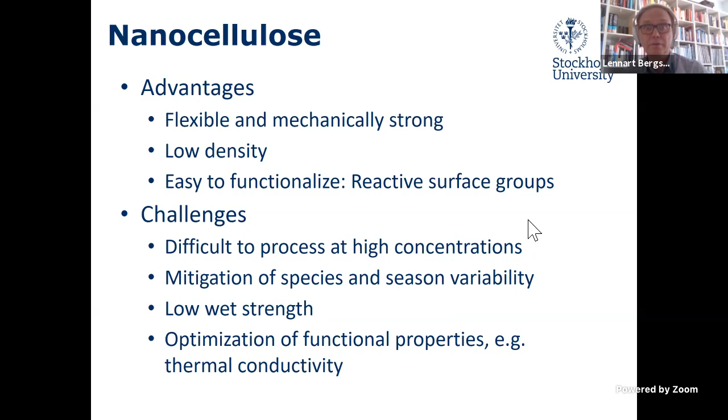So the content of the talk will be, I will present our recent work on the leather-inspired engineering of multifunctional biohybrids with high wet strength, then go over to a patterning. I will present that relatively briefly.

A Bogolan-inspired patterning in nanocellulose films, and then focus on the heat transfer of nanocellulose-based materials, going through the fundamentals, talk about films, and then isotropic foams and aerogels, and then on anisotropic foams, giving examples and trying to relate this to the fundamental modes of heat transport.

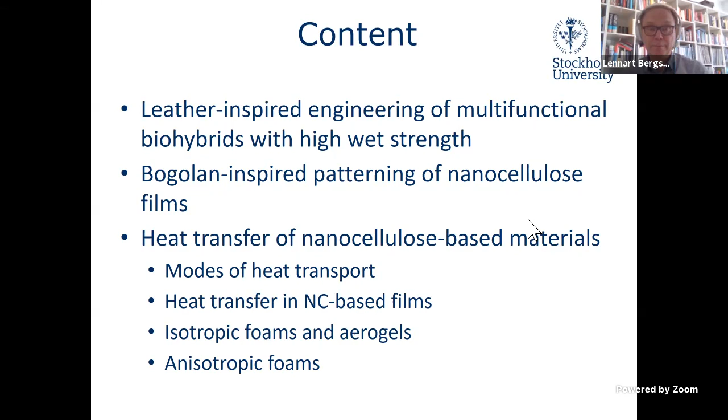Starting then with the improvement of the wet strength by a leather-inspired approach. This is work done by my PhD student, Konstantin Kriechbaum. It was recently published in Biomacromolecules. And the idea here is relatively simple. We have been inspired by how leather is being made.

And the basic process in leather making is a precipitation of the proteins by tannins. Today, there are other types of compounds being used, but the traditional way of leather making was to use tannins. So it's a precipitation of proteins.

And these precipitates then have a very low water solubility. They are quite robust and also flexible, which is why leather has quite nice properties. And our idea was simply, can we also instill these kinds of properties into a nanocellulose-based composite?

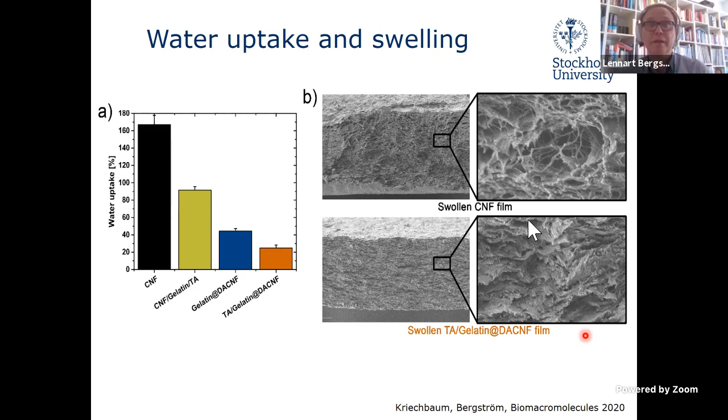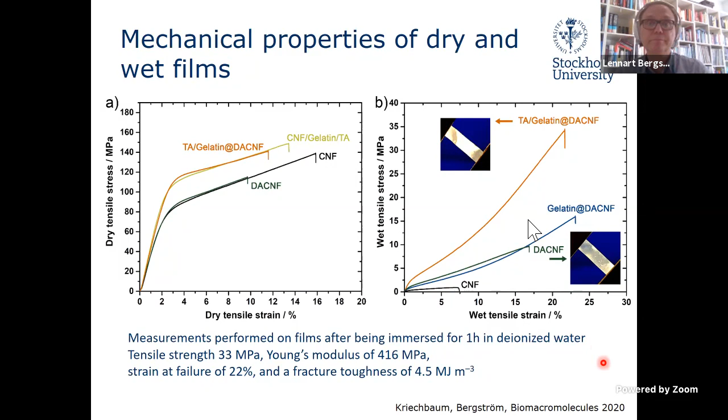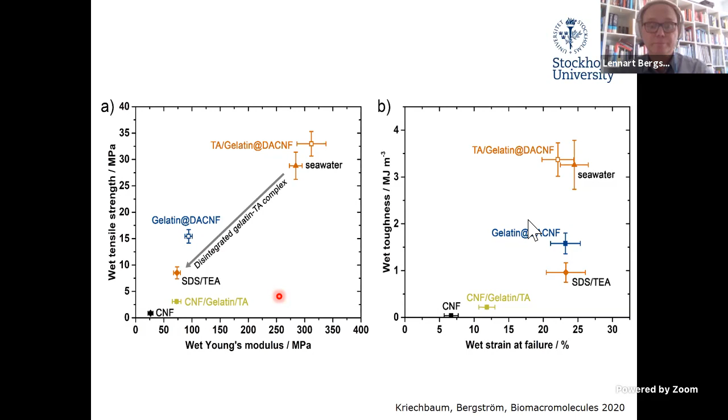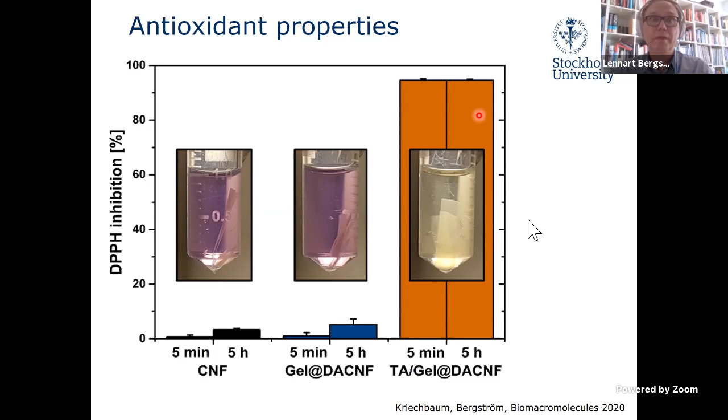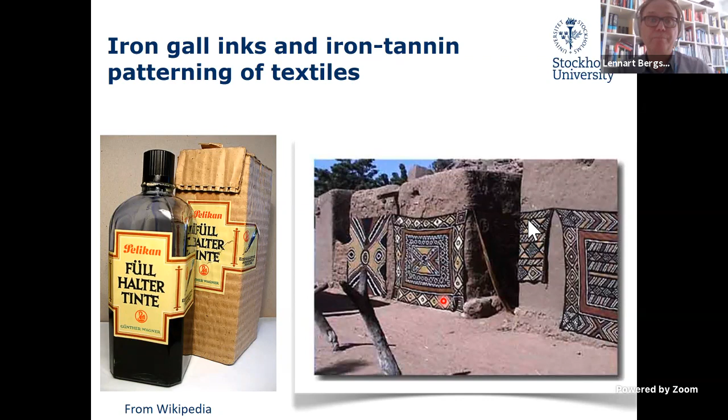But it's also important for a lot of dyeing of textiles, in particular cotton-based textiles. And this is an example from the so-called Bogolan type of dyeing, which is very important in the country of Mali. We took inspiration from this and tried to devise a patterning method based on iron and tannins. And this is an example of when we are mixing the tannins, like gallic acid, ellagic acid, and tannic acid, with an iron source and cellulose nanofibrils.

This was supported by modeling done by Jakob Wohlert within the Wallenberg Wood Science Center, trying to understand how gallic acid and ellagic acid interact with the nanocellulose, and how they cluster. And the modeling clearly showed that the interaction is immediate, but the mobility of the gallic acid and ellagic acid on the surface of nanocellulose is quite rapid. And that's why after a short time, they will form these kinds of clusters. And it's these clusters which later react with the iron, forming the coordination complexes.

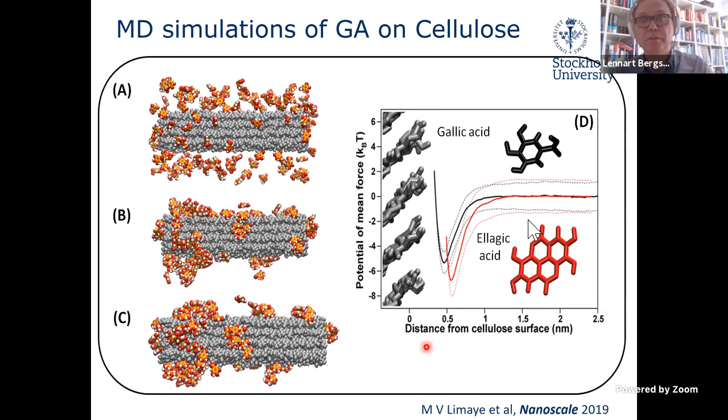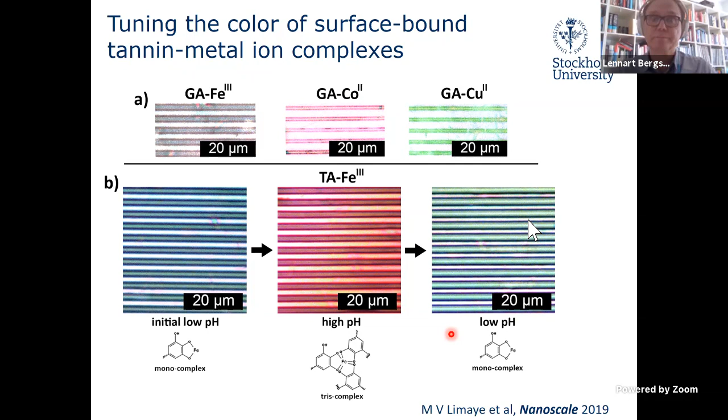At low pH, it's dominated by a monocomplex, and the tris complex is dominating at high pH. And as you can see, these have different colors, suggesting that this kind of simple patterning approach can also be used for sensor applications. Okay, let's move on to the final part, which is going to be on heat transfer.

Typically wood has a factor of 2 or more difference in heat transfer, transversal or axial to the lumen direction. And some people have utilized it to study the effect of alignment in thin films. I'm going to give an example of that, in particular work by Dr. Uetani in Japan, who studied drawing films with various forms of cellulose nanocrystals, and then studied the thermal conductivity as a function of the order parameter in all 3 directions: the draw direction, the transversal direction, and the normal direction.

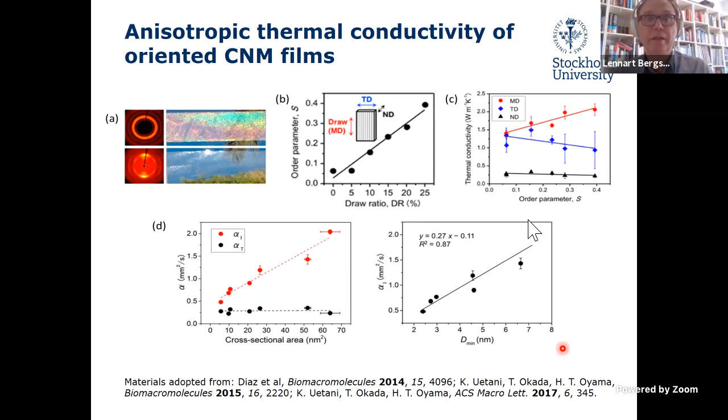Moving over to foams then, where my own research has focused. I think all of you are aware that there is now a lot of interest in making nanocellulose-based foams. They are lightweight, pretty strong. But one of the big challenges is, of course, how to make them. Here, the removal of the solvent, which is normally water, and the engineering of moisture uptake and release are crucial points.

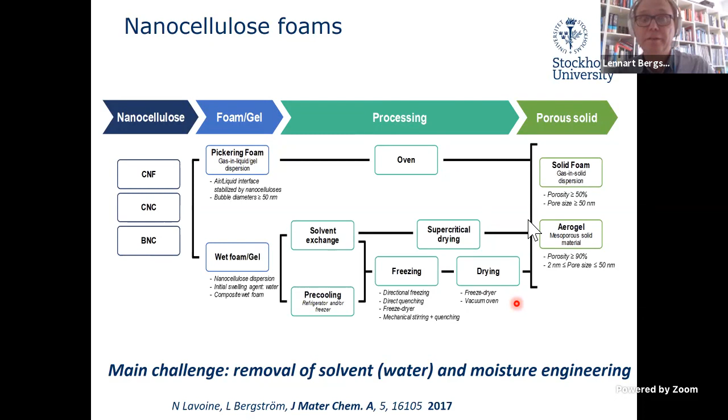Here's an outline of the main techniques to produce them: either supercritical drying, freeze drying, or evaporative drying, in an oven or just at room temperature. Of course, evaporative drying has the advantage of scaling and being pretty cheap, but the problem is that you have capillary forces during drying, which can collapse the structure. That's why quite often supercritical drying and freeze drying are preferred.

Here are a couple of examples of isotropic nanocellulose-based foams produced by evaporative drying. This is early work done together with Lars Wågberg and his group, where a Pickering foam was made using a short chain surfactant, octanol, or octanoic acid, which provides the particles with some hydrophobic character. And this was done in my work, where we also used calcium as a way to precipitate or strengthen the network to resist the stresses during evaporative drying.

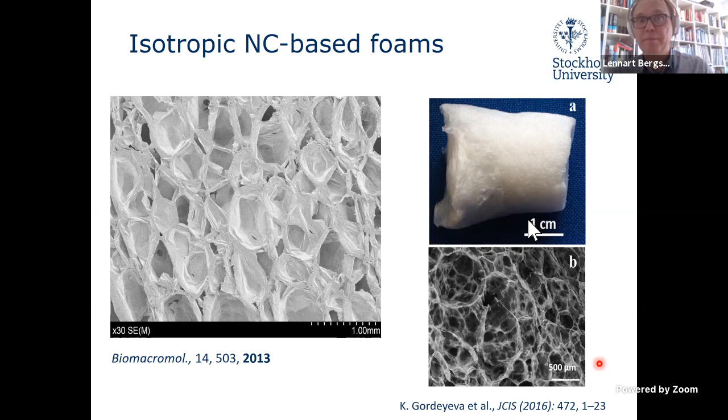But the key point here is that the pore structure is isotropic, and there is no preferred alignment of the fibrils. If you have such a case, you can analyze the modes of heat transport based upon classical theories.

And there are basically the 4 major contributions to heat transfer. I don't have time to go through in detail, but convection is one, of course, the transport of gas in a temperature gradient. And basically you minimize convection if the pore size is small enough. Radiation is a process which becomes important at elevated temperatures, but at room temperature, it's relatively insignificant. So for biomaterials which cannot really stand high temperatures, this is also not a major contribution.

And that's why we normally focus then on the gas conduction and the solid conduction. And when it comes to the gas conduction, the main issue here is the mean free path of air. So if you can start to reduce the pore size below the mean free path of air, you can have the so-called Knudsen effects, and that means that you will have a reduction of the gas conduction contribution.

And the solid conduction is all about phonon transport, lattice vibrations. And if you can then scatter these phonons, that means that you can also reduce solid conduction. So interfaces here play a major role. Scattering at interfaces, and that can be interfaces within the material, grain boundaries, but it can also be interfaces between different components, in particular if they are nano-sized.

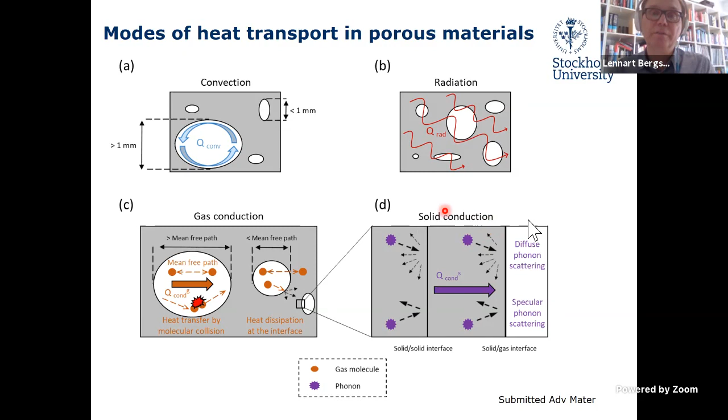And that suggests, if we go back, that even though you reduce the gas conduction for the supercritically dried foams, aerogels, it is the reduction of the solid conduction in the freeze-dried foams which plays a bigger part and can explain this behavior. But that calls for a much more detailed analysis of the interfaces, which is, I would say, a very important challenge for the future to try to understand.

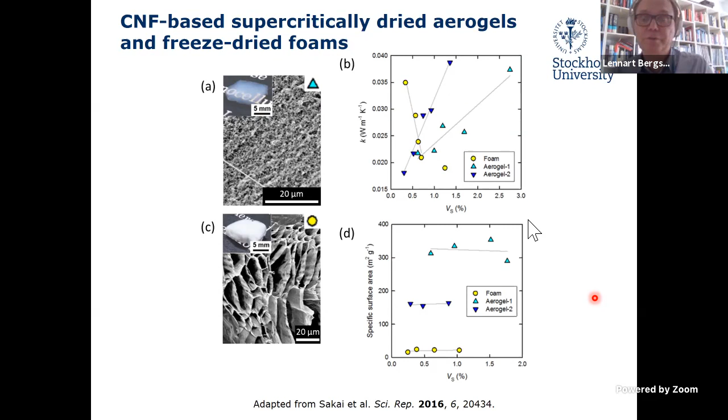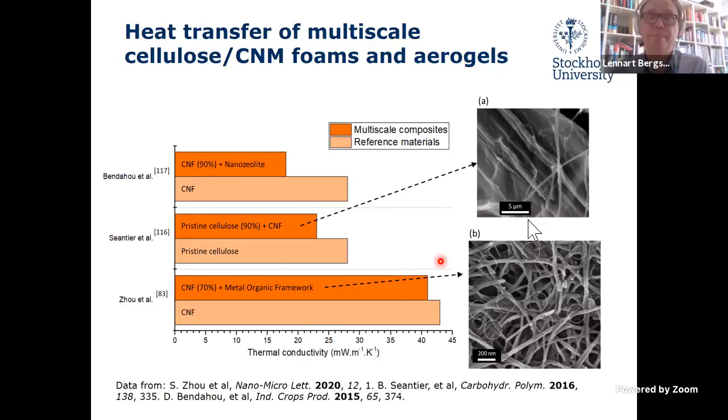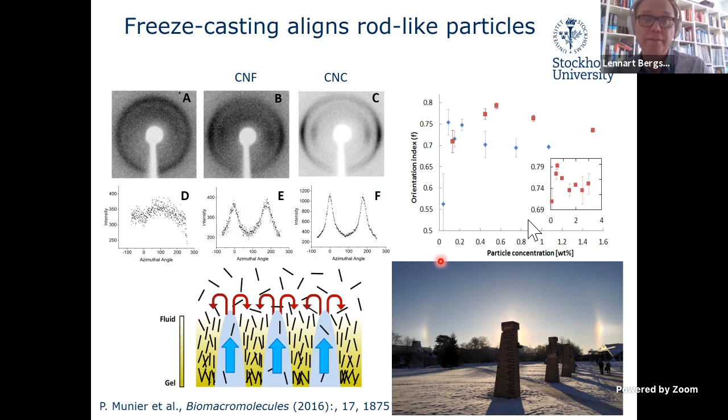Freeze drying and freeze casting has the possibility to align the fibrils, and that means you have a possibility to utilize the anisotropic properties of the fibrils, because they have, as I said before, a factor of 8 difference in thermal conductivity in the axial and the radial direction. And that's something which clearly is manifested here.

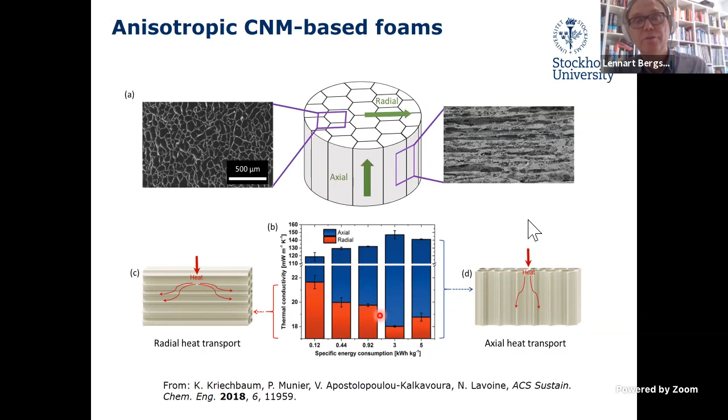You can see the difference in the radial and the axial heat transport, where the red is the radial, and the specific energy consumption actually relates to diameter. The higher energy consumption, the smaller the diameter, and then the radial thermal conductivity is being reduced to below the value of 25, which is the typical value for air. So these are super insulating materials.

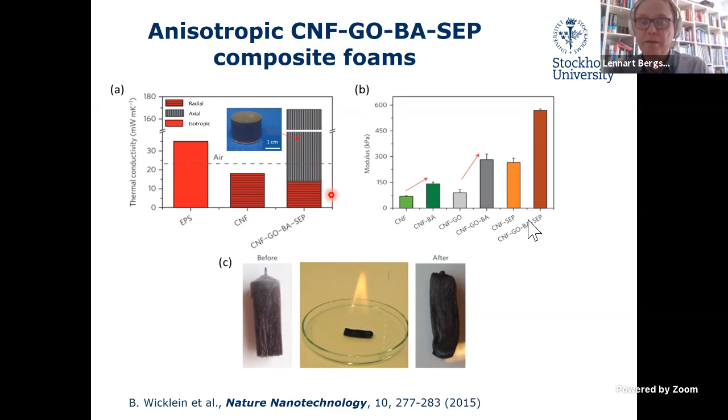And this was actually the early inspiration, where we were mixing CNF with graphene oxide and sepiolite for fire resistance. And we could really achieve these kinds of low thermal conductivities. And now, after some more years, we start to understand the importance, in particular, of the interfaces and the phonon scattering. And that's something which we want to continue to work on.

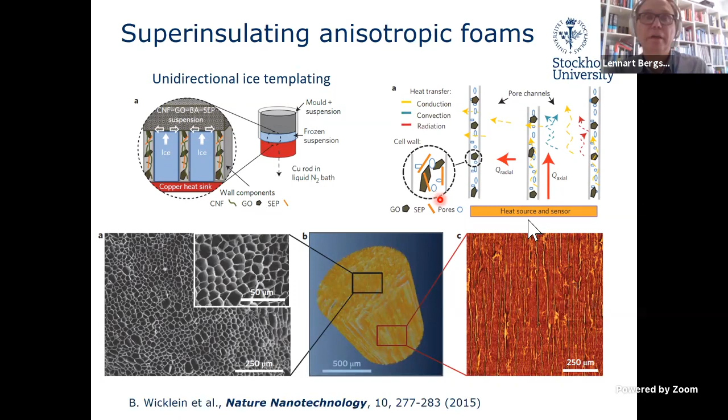Yes, and this is just to highlight the highly anisotropic structure of these, with the pores, the macropores also aligned, which is a consequence of the ice growth and the alignment of the fibrils at the same time.

So to conclude here, when it comes to heat transfer and thermal conductivity, when we talk about the fundamentals, I would say the understanding of the pore structure and how to control it, the heterogeneous interfaces, and the nanoparticle alignment is the key. And it's quite interesting to see that there is basically a complete lack of such studies in the literature, where all of these parameters have been carefully controlled and characterized.

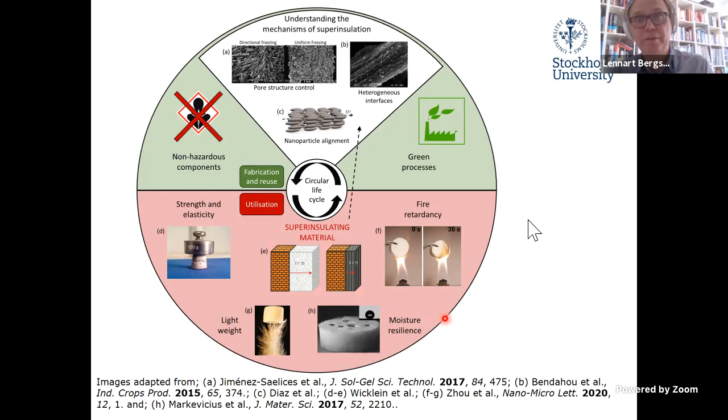And that suggests that we still have a lot of possibilities for the optimization of the material's properties, and of course to combine it also with high strength, high moisture resistance, and fire resistance. So with that, I want to conclude.